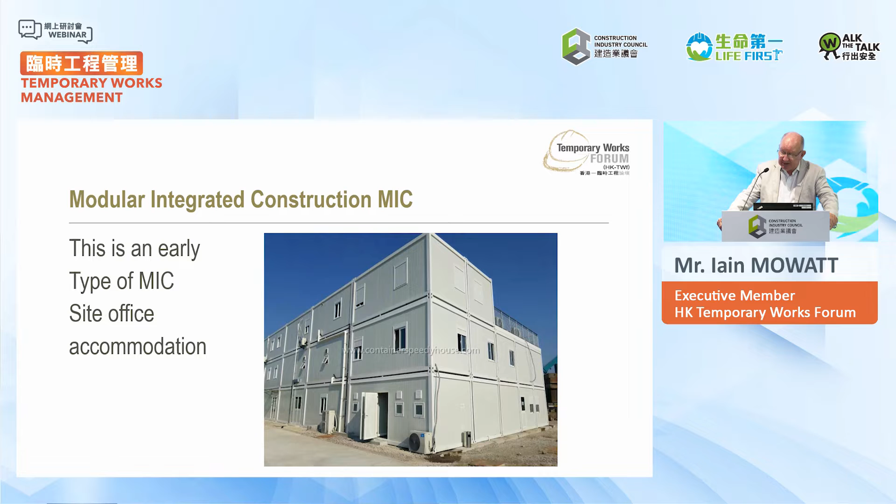So we started with MIC. MIC is not a new concept. It's quite an old concept. The containers you see was the very, very, very early MIC. Then we started making up units, and we started erecting the units on site. So we've moved a very unsafe process into the factory. However, it still has problems. We precast in the unit, we're fitting it out, we've got pre-finished, and then we move it onto site.

So we have some challenges with MIC. It's very heavy. We still got working at height because somebody has to get up onto the top of the unit to release the crane shackles. So we still have working at height. We still got challenges with that.

And there is an issue with lifelines and anchors on that. Generally, when I've seen people unshackling containers, they are fixed to a lifeline that is actually below their feet. The anchor point is below their feet. So if they fall off the container at height, then it's a fixed line lanyard, which probably the anchor will fail by the time they stop falling, or if it's a lower height, they hit the ground before an elasticated lanyard works.

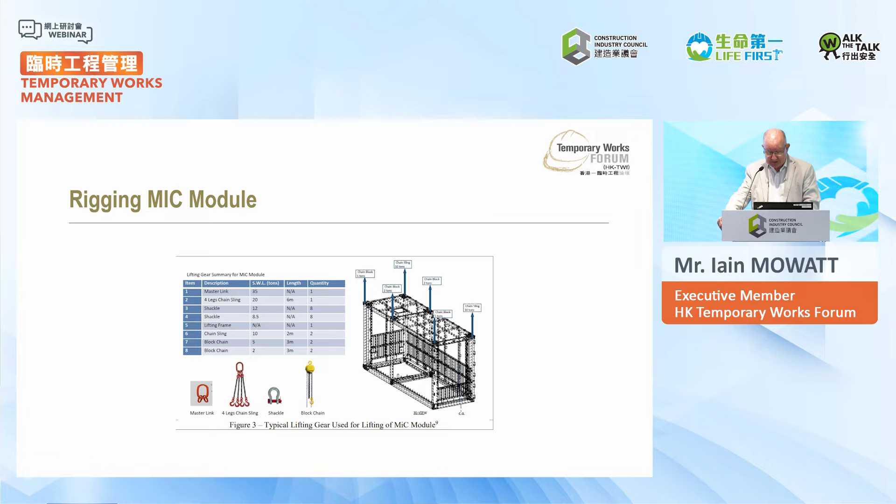So there are challenges with MIC, but it is a major, major step forward. Of course, the other thing with MIC is it's quite expensive because we've got double slabs, we've got double walls, and whilst that's very good for sound insulation, it's not very good for cost. So the double wall system and the double slab system is excellent from a fire protection point of view, but it's not very good for a cost point of view.

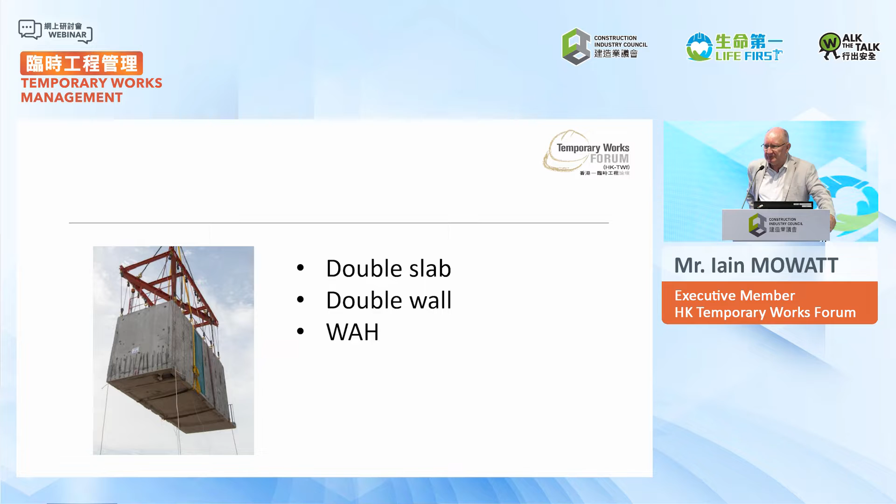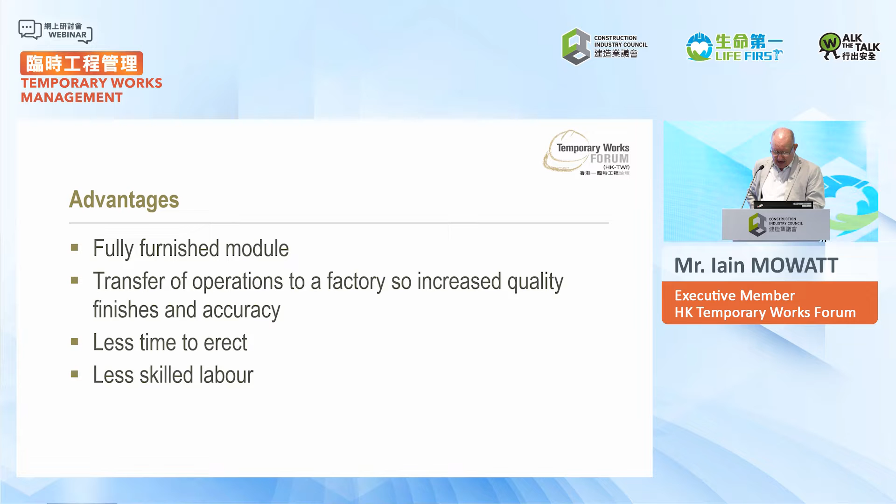So the fully furnished modules, the advantages are that we transfer operations to a factory, so increase the quality. There's less time to erect, less skilled labor. So all the things that we need to achieve, it does achieve. However, it does have some disadvantages. The weight is a disadvantage, and it doesn't totally eliminate work at height.

The grid size is limited to road transport, 3 meters by 6 meters. Now, Cambridge University did a study on grid sizes, and they came out with a number that a 15 by 9 meter grid suits every single building ever built anywhere in the world, which is a sweeping statement, but it does seem to fit. So a module that works within the 15 by 9 meter grid is ideal.

So then we move on to the factory in the sky. Now, this was a very brave experiment. It was done in East London by Mace. A very brave experiment. It never really worked. But it was a very, very good idea, because you transferred all of the site activity to a factory activity, but the factory was actually on the site. So it was a very good idea.

The photograph there is an aerial view of the factory. It was lifted on the 4 corners of the building, so it was very complicated hydraulics to lift it. It was all fully automated insofar as it was all precast. There were no tower cranes on the site. The orange things were the cranes, a gantry crane, moving over the top of the factory, lifting precast units into place.

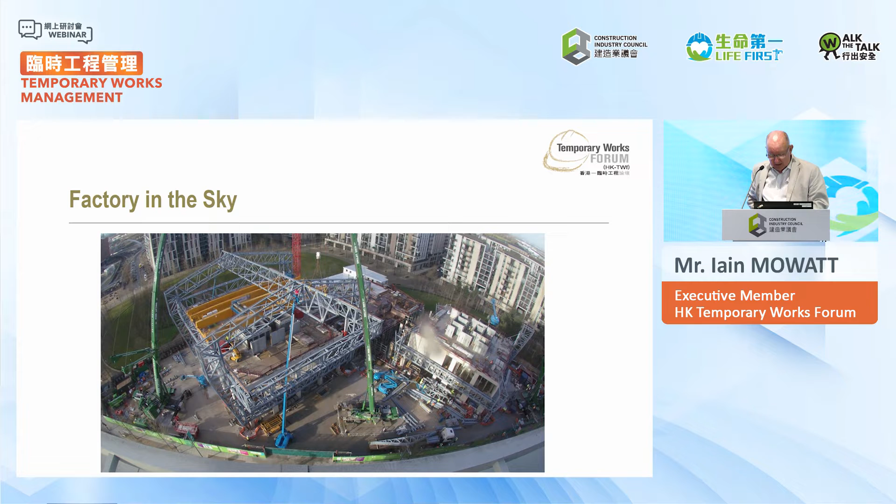The advantages were that it was all precast. It was a 10-day floor cycle, including the finishes and the curtain walling. So it was a completely weather-tight structure, lifted up, and it was modern methods of construction.

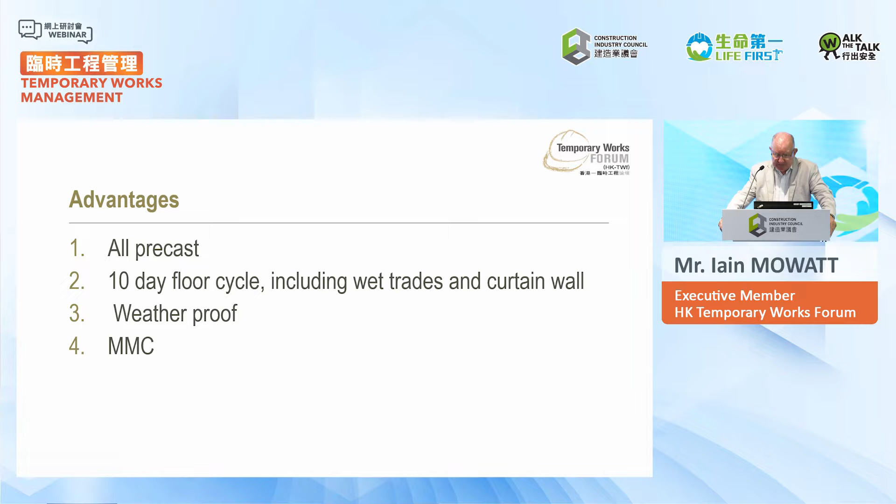The disadvantages are it was very, very difficult to dismantle. All the time they made up in the construction was lost in the dismantling. It was also expensive, it cost 8% of the total building cost. And there are very, very few subcontractors with that kind of hydraulic experience, because you had to lift the whole thing on the 4 corners of the building.

So I did some work for Bryden Wood a while ago, and I was really impressed with what they were doing. They adopted a platform approach very much copied from the car industry. For example, an Audi has got exactly the same platform as a Volkswagen, exactly the same. And that's what they set out to achieve.

So I'm going to show 2 videos now. The first is the module, the mock-up that they did to show that the modular approach would work.

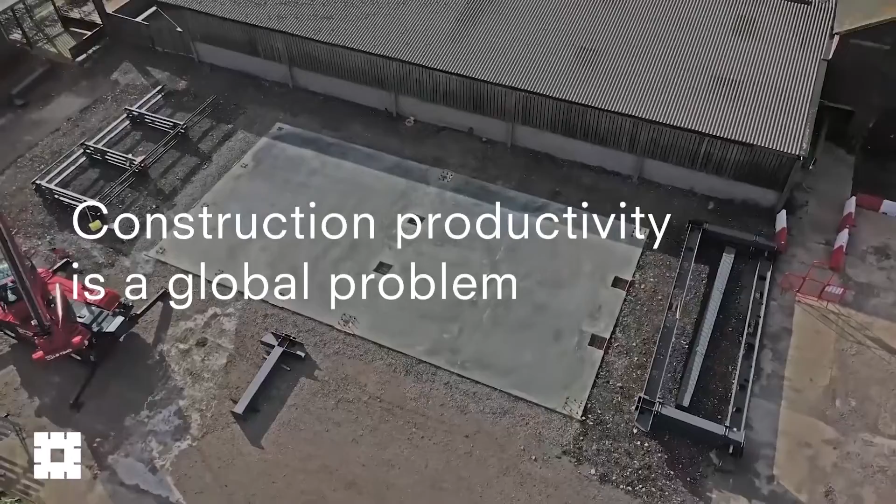Today we're in the Construction Platforms Research Centre in a place called Ropley. It's actually a farm, but a farm that I think is going to be a catalyst that's going to help change the future of the construction industry. Today we've been showcasing some work that we've been doing researching the use of platforms in construction.

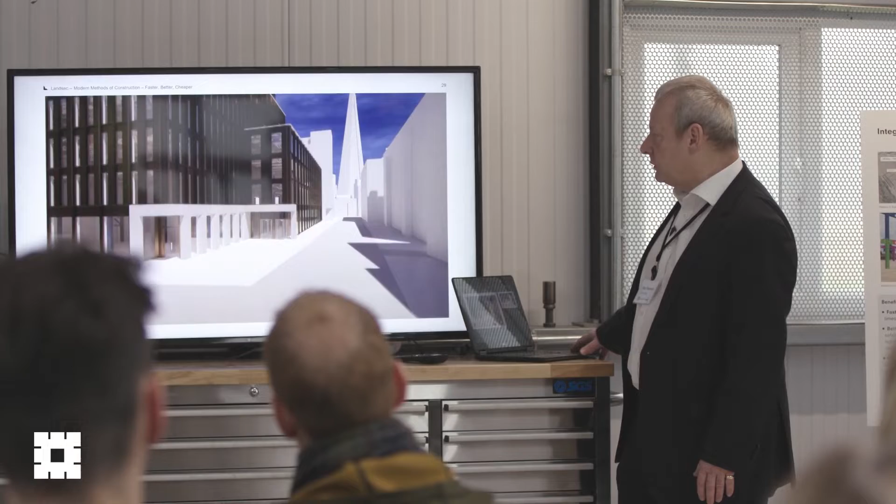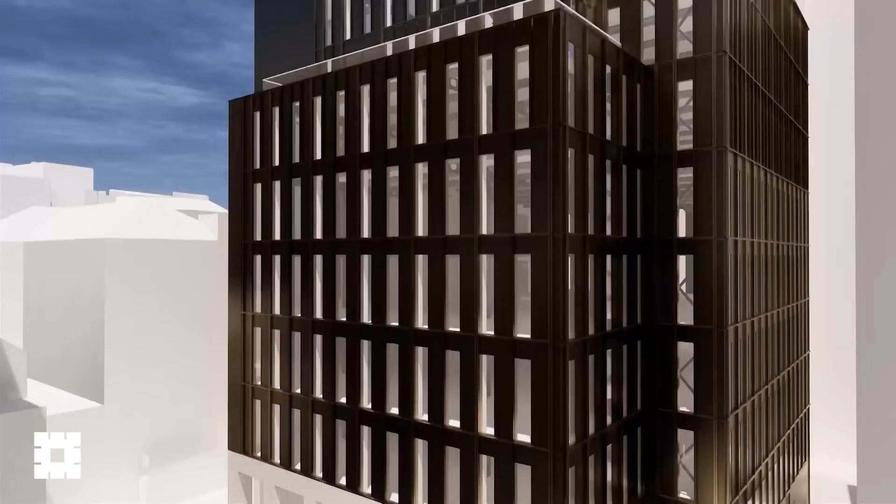The vision was, how can we take the construction of a commercial office building and break it down into a kit of parts that we could deliver onto a site and assemble, rather than construct a building in a traditional way. So what we've got to do is take the precasting techniques and bring them to site.

What we're doing here effectively is we're trying to develop what we call the productive routine, so the processes that people can repeat time after time safely on site and efficiently, which drives productivity.

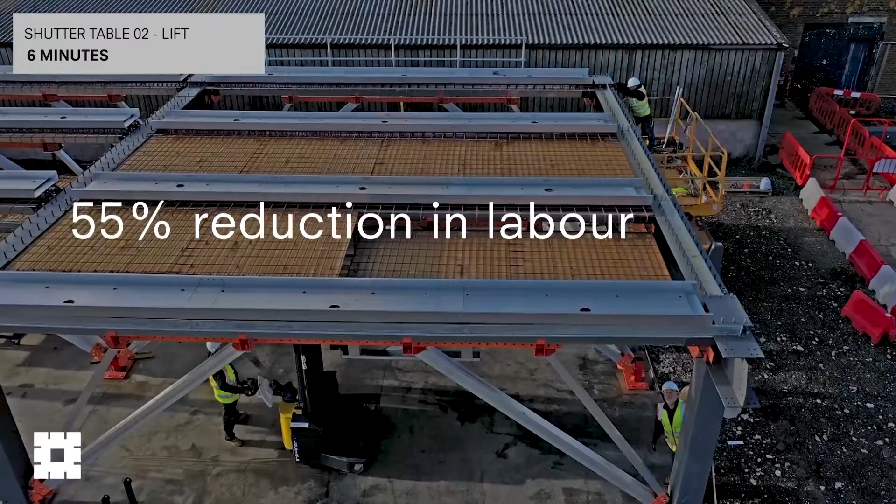So the Transforming Construction Challenge is there to help the sector change the way it works. And this project, it's almost an ideal example of the kinds of things we want to see. We want to see a kit of parts approach coming forward, a platform approach to buildings, taking a manufacturing discipline to construction so that we are changing the processes.

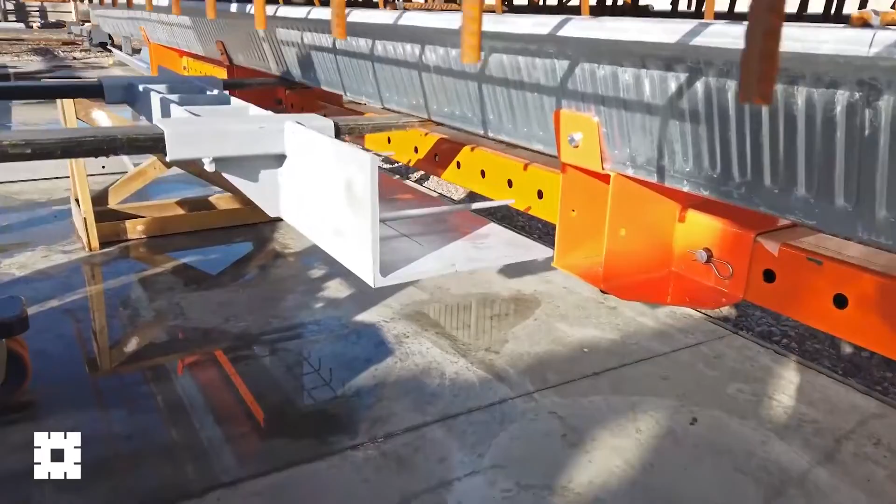The prototyping has been key in being able to prove that those ideas are practical and really work, and to build the confidence both in ourselves as a client and in the construction industry partners that we would use to build a full-scale project.

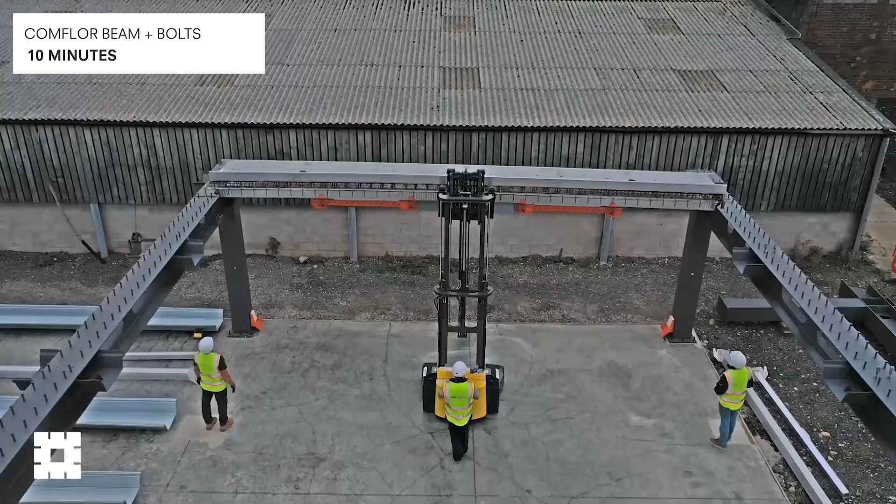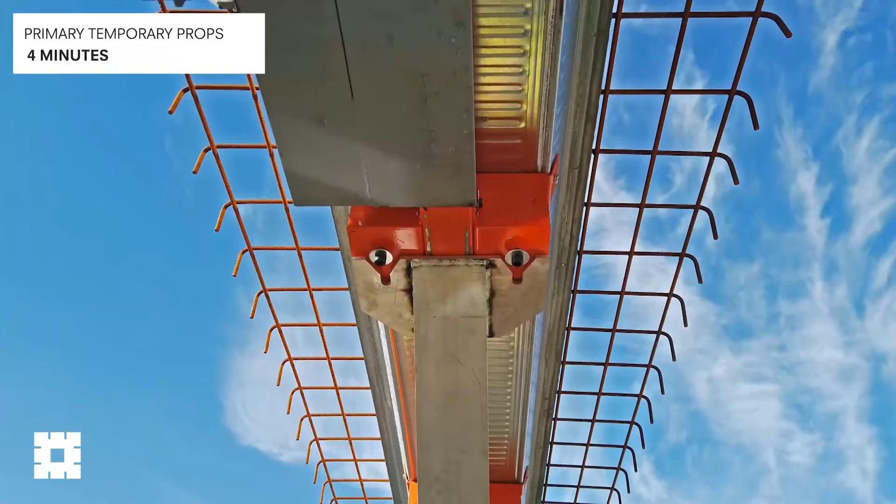This project takes out so much of the interface problems that have caused so much trouble in the past. It just uses intelligent techniques like not lifting up the really heavy stuff or not transporting the really heavy stuff miles and miles and then craning it into place, making a set of very standardized lightweight components that you can put together really easily with low manpower, and then pumping in the concrete at the last minute.

So our involvement in this project has been as the design development team alongside Bryden Wood and the prototype builders. This is the third platform.

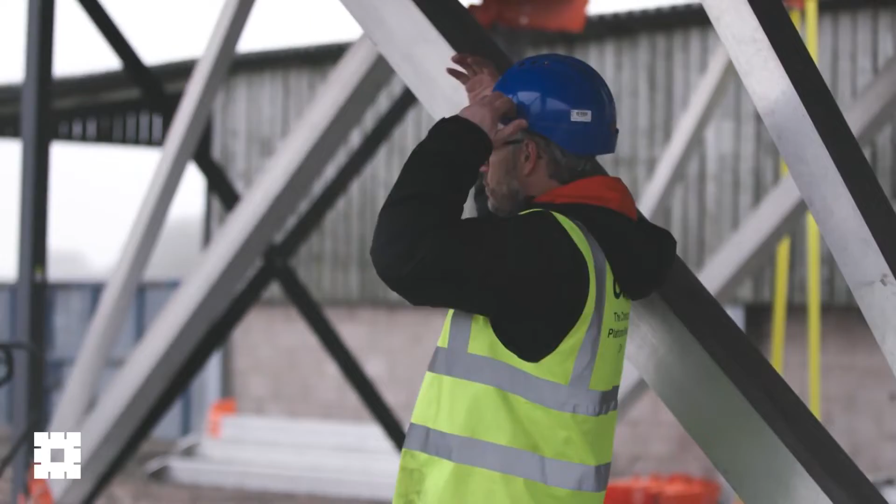Platform 1 was for smaller spans. Platform 2, again, that were a larger span, and that were for residential, which got companies like Landsec who were wanting to improve how they build their offices. Offices need a larger span than what Platform 2 can offer, so naturally we called it Platform 3 and gave them larger spans.

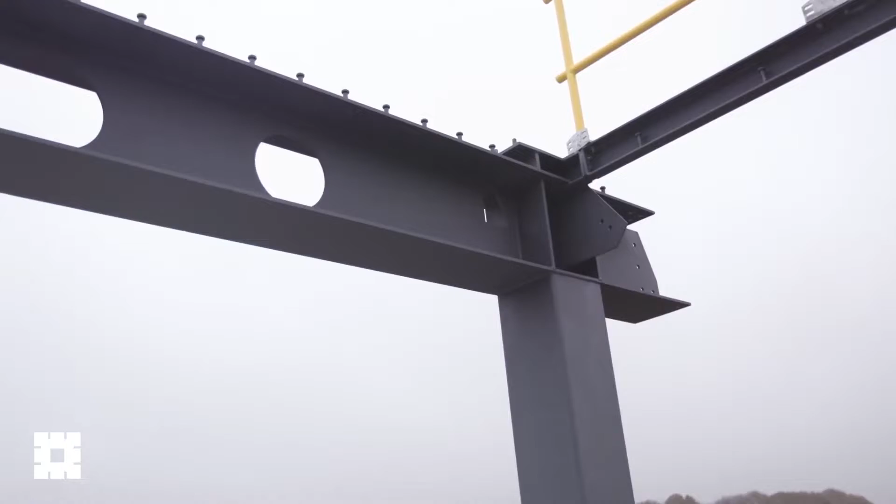So for us, delivering the kind of targets we wanted to see in terms of faster delivery of projects, lower cost, greater productivity so we can produce more with the same workforce, and reducing emissions and improving the whole life value of the buildings.

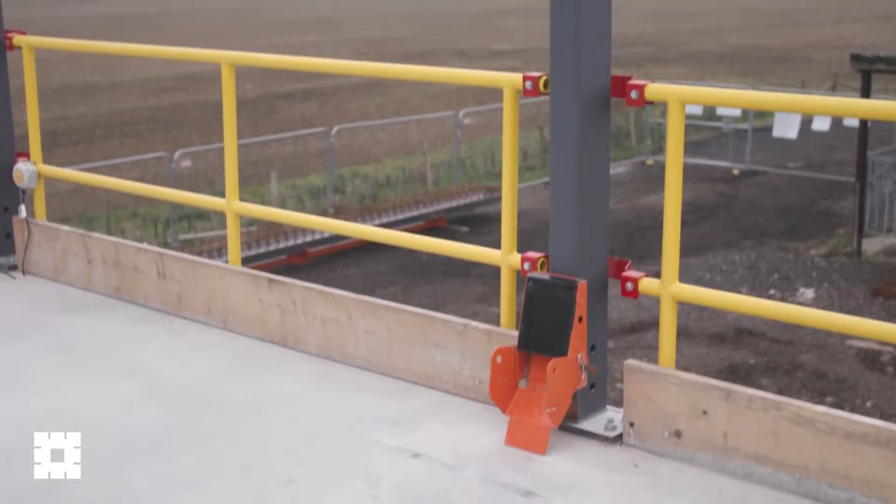It's important that we don't just get time and cost savings, we need to do things better, we need to do things safer. It reduces the amount of people or workers that have to be on site, so that means that it reduces the risk in terms of having accidents and incidents.

We've gone from the sort of laboratory into the real world, and the real world is now really, you know, we've been on site at Sumner Street and ready to start construction in the early part of 2020. So getting all of that learning and applying it straight away is fantastic.

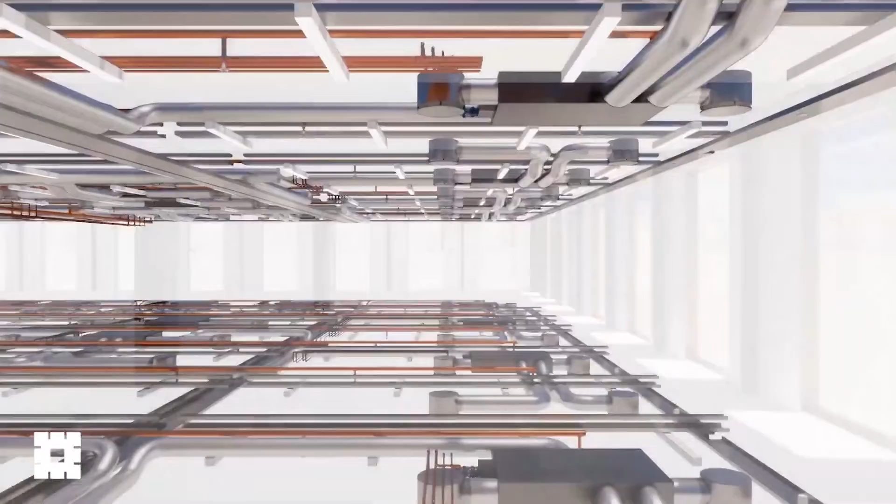It's always hard to innovate, it always feels risky, and the team have marched through all of that and achieved a huge amount, and we really have line of sight now to executing on this first building down in Southwark, to then take it on to the next and the next and the next.

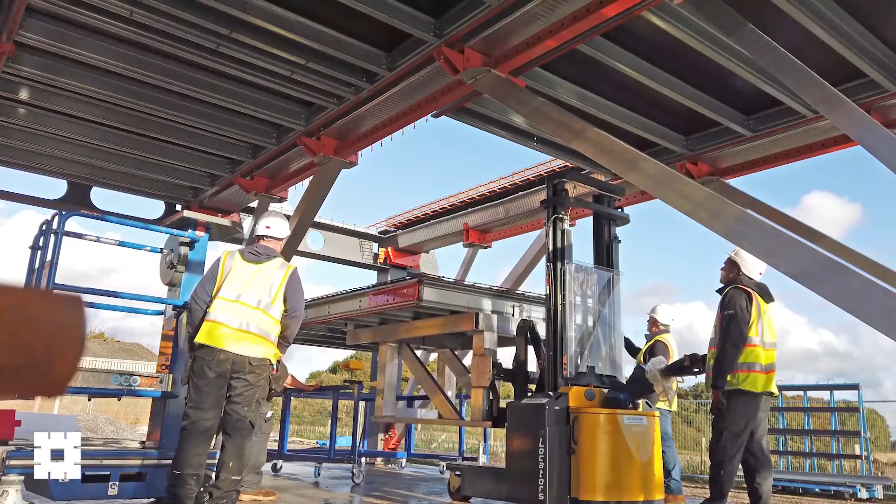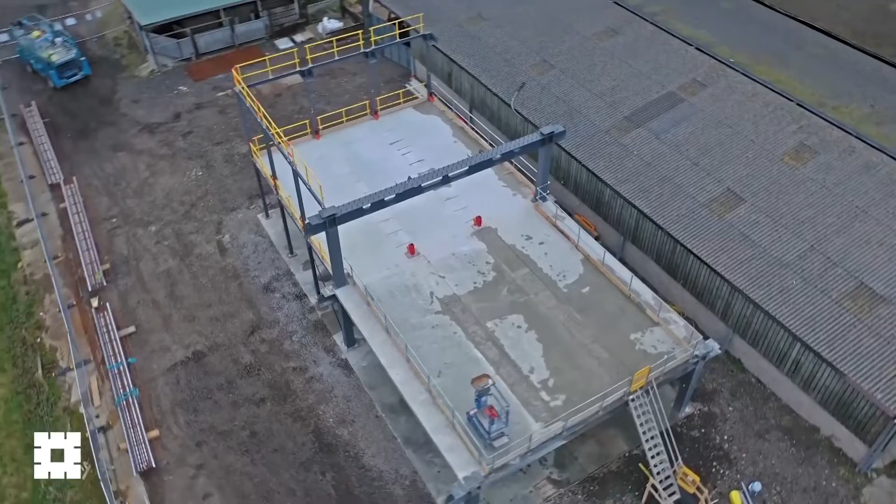There are tremendous opportunities to improve productivity in construction. Unlike other industries which now are making incremental gains, we've got this opportunity to really leap forward in terms of productivity. You have one of the UK's largest companies working with one of the UK's smallest companies, with probably one of its most innovative design organisations, that have come together to really produce something that we hope will start to change the way that buildings are designed, delivered and constructed.

That was the platform approach provided by Bryden Wood. I'd just like to show a video of the actual office building that they did build in London. The building is called The Forge, and Bryden Wood put it together. This is a very quick video of that.

Welcome to The Forge in central London. What you see around me is one of the most significant events in the future of construction. The Forge is the world's first major commercial development, developed by Landsec, to be designed and built using a platform approach for design for manufacturing and assembly. It's also the UK's first net zero carbon commercial building.

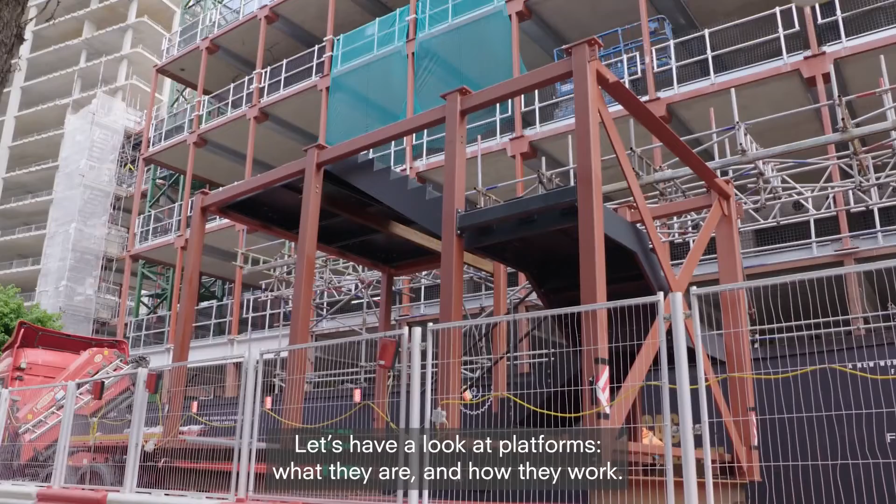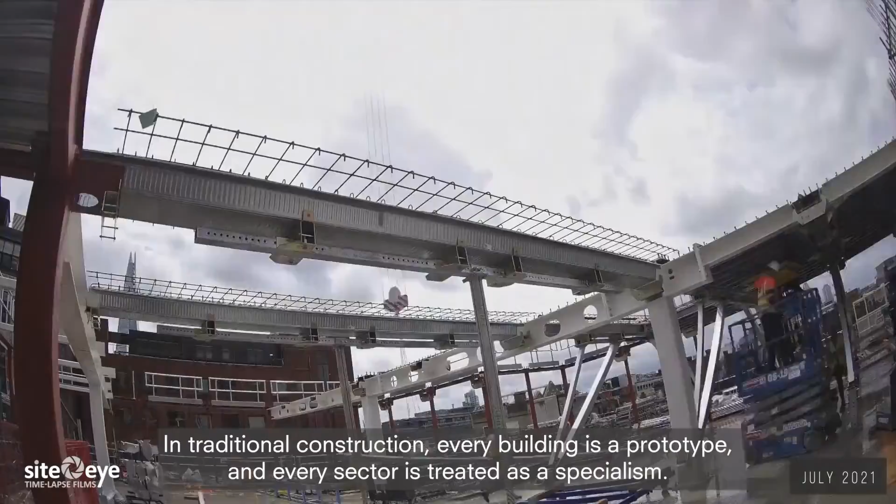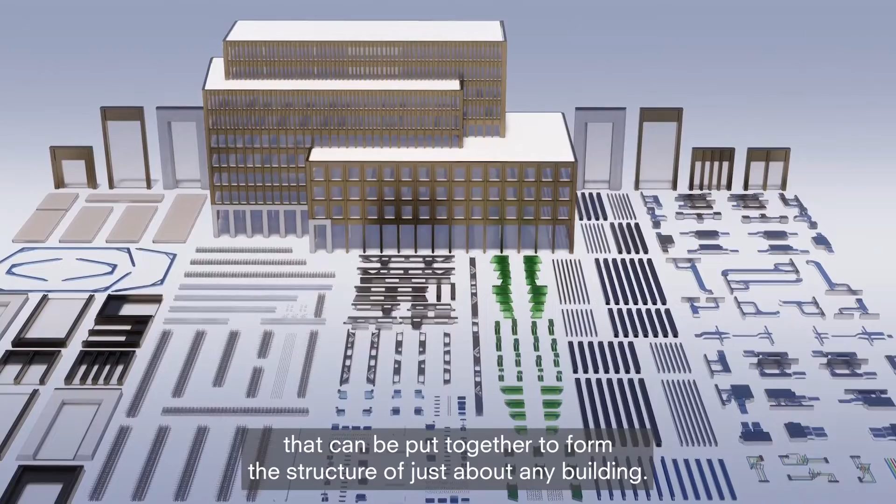Let's have a look at platforms, what they are and how they work. A platforms approach takes the lessons learned by the manufacturing industry and applies them to construction. In traditional construction, every building is a prototype and every sector is treated as a specialism. The platform approach looks for commonality between sectors. By working out what buildings have in common, you can design a standard kit of parts that can be put together to form the structure of just about any building.

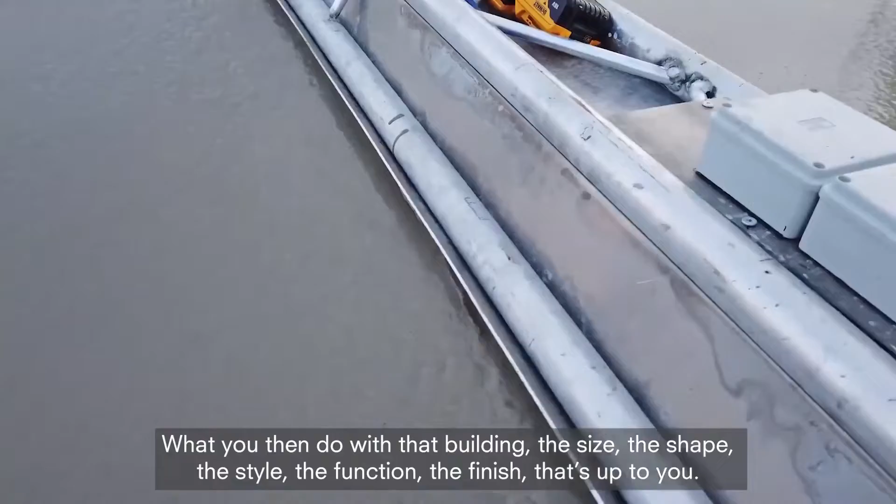Standard parts fit together in standard ways, so the building is leaner and quicker to put up. What you then do with that building - the size, the shape, the style, the function, the finish - that's up to you. Standard parts are also designed and refined repeatedly, so the finished article is the best it can be. And because they are standard, they are manufactured precisely, which means we use fewer raw materials and there's no waste.

Here at The Forge, that translates into an increase in productivity of 30.5%. And we're reducing embodied carbon by 24% compared to a traditional commercial office. On a normal building site, around 30% of all materials ends up as waste. Not here.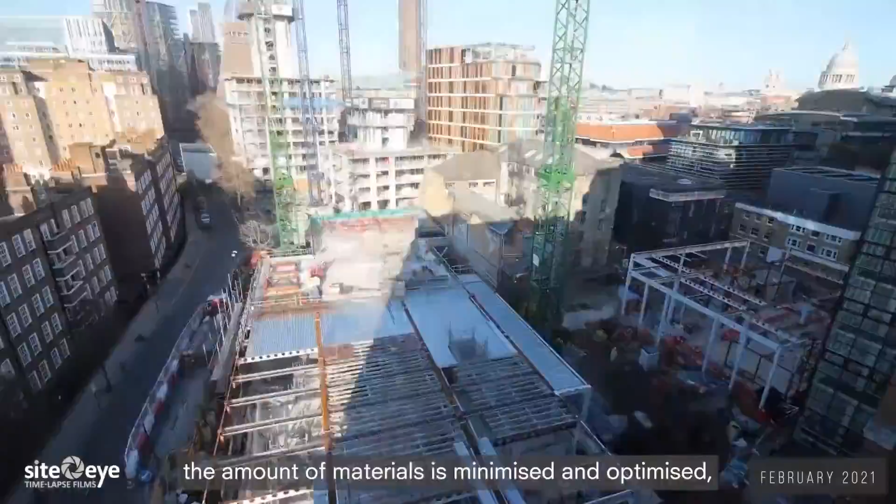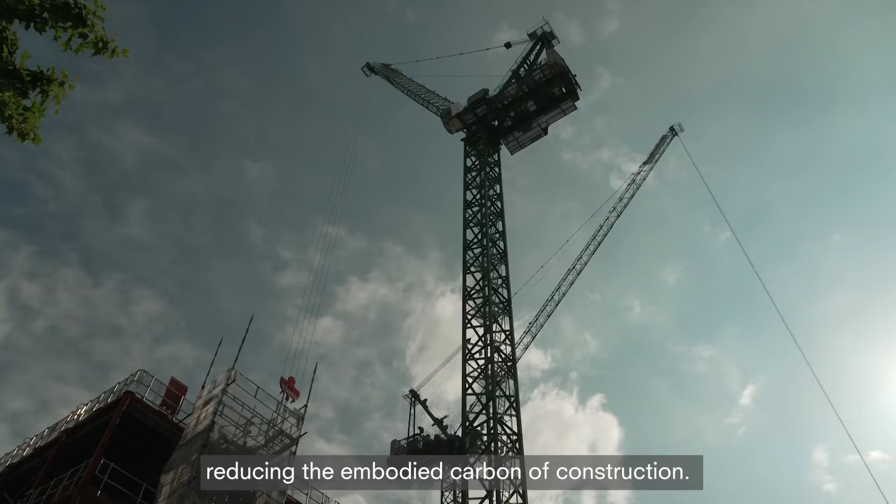I think another area that this project really helps is we're all focused on reducing construction impacts. We're all focused on net zero carbon buildings for the future. Having an approach here where the amount of materials is minimised and optimised, and where waste is reduced to an absolute minimum, are great steps towards achieving that goal, reducing the embodied carbon of construction. In addition, we've designed this building to be particularly energy efficient, using a zero carbon solution for our heating and cooling - air source heat pumps powered by electricity - taking us forward to a future where buildings will all be built to some degree in this way.

What's so exciting and transformational is this is not a theory. Look around me, this is real. This is real change happening right here, right now.

So Bryden Wood reduced the amount of tower cranes required, and they improved the energy efficiency. But what is important is that they totally eliminated work at height, eliminated it altogether. So it was a very efficient building.

The disadvantages are that we're going to have to radically change the way we procure construction, and we're going to have to engage with the client right at the beginning. That's a positive plus, but getting clients to change is going to be very difficult. We've also got to engage with architects - generally they don't have any Hong Kong experience - and we've got to get used to a DFMA approach, including for the E&M and ABWF. So that is for buildings.

For civil engineering, we've got to embrace technology to do it. I was a judge on a safety by design initiative some years ago, and VSL put in a proposal for the OHVD on the Tuen Mun-Chek Lap Kok tunnels. I'd just like to show you very briefly what they did there.

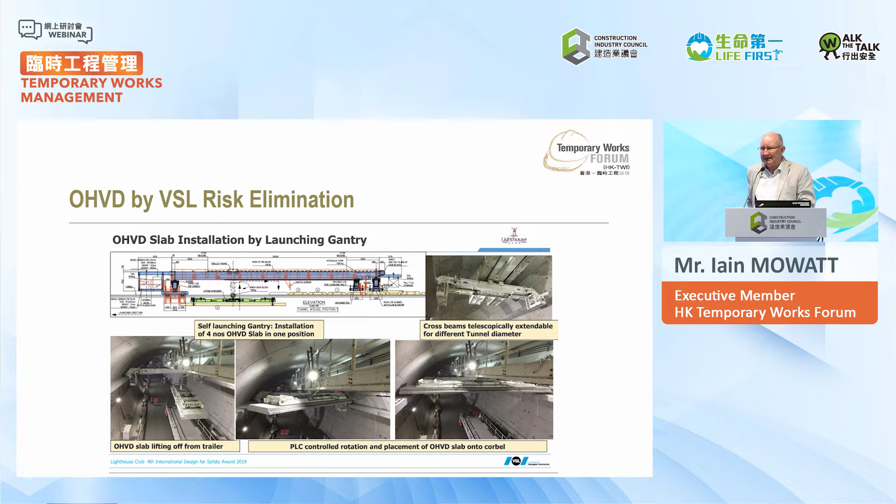So there is a future for construction, but we cannot continue the way we are doing. I'd like to receive feedback from the listeners now. If you've got any questions or comments on this, please email CIC, the safety seminar, at cic.hk. Thank you very much for listening.

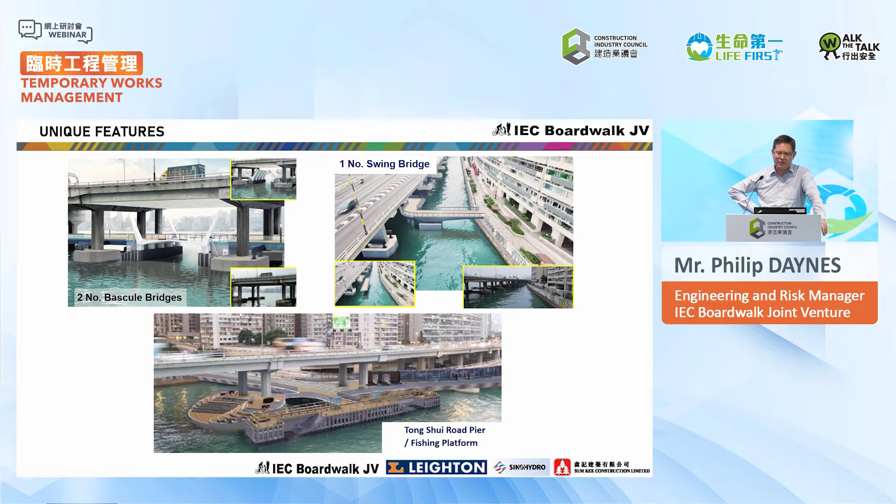This is a video put together by Meinhardt, CEDD and LWK during the design stage, showing what the project will look like. We start down on the Causeway Bay side - you can see the boardwalk is outside of the perimeter of the Island Eastern Corridor, then it moves underneath, with a number of viewing platforms all along the alignment.

Then we move to the first movable bridge. The movable bridges are required to allow boat access to the inside waters, because generally the boardwalk is quite close to the sea level, so it's an obstruction to boat traffic. Moving up, we come to the swing bridge, near the Provident Centre, which again will allow boat access along that inner waterway.

More viewing platforms, and then as we approach North Point, the boardwalk comes out from underneath the Island Eastern Corridor, as there's a slip road that comes down, and then we come into Tong Shui Road Pier. At this location, we're going to build a new fishing platform with cascade steps, which will allow users to get close to the water level - this is quite a popular fishing area as well.

So that's an overview of the project. Now moving on to temporary works - what are temporary works? Temporary works is pretty much everything we do on a construction site. There are many forms, from tunnel supports, tower cranes, slope works, false work, demolition, to permanent works that are being used as temporary work. So every engineer on any construction site is going to come across temporary work.

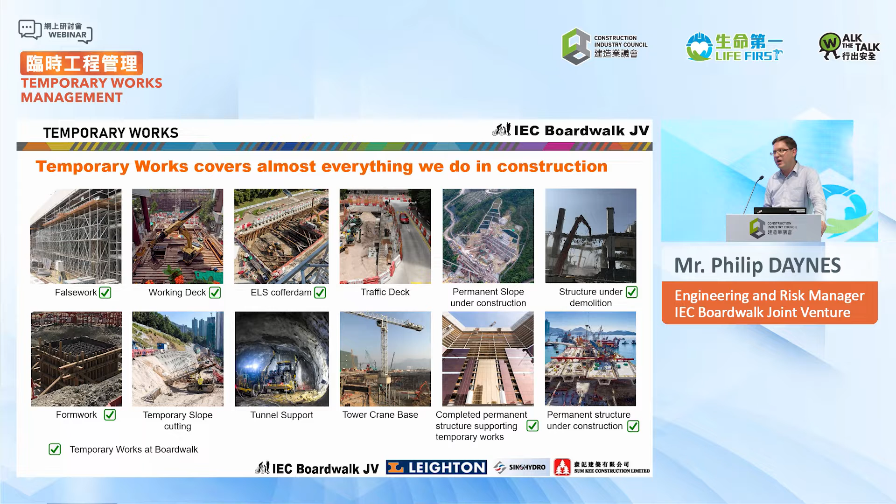It's almost everything we do. We've got a whole range of different types of temporary works on the boardwalk. But unfortunately, as Iain touched on earlier, temporary works often fail. This results in injuries and fatalities, and it's really an unsustainable position. We can't keep killing our colleagues - it's just totally unacceptable.

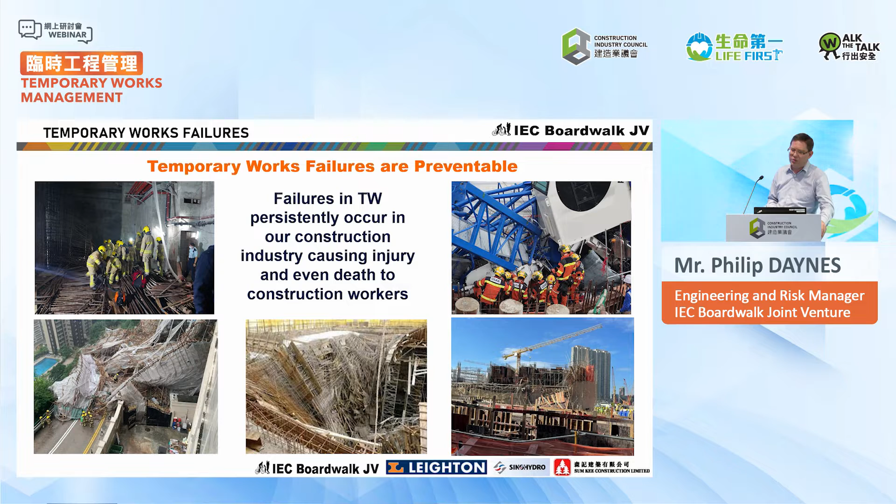So we have to work on ways to improve that. Iain's touched on some of those, and you'll see some of those in the presentation. But even where we're working in a traditional style, we still can do more. The Temporary Works Forum and CIC have published guidance on temporary works management. It's good practice, and the objective is to minimize injuries during temporary works.

On the Boardwalk project, we have a design and control of temporary works procedure. That was introduced in 2022 at the start of the project, before the CIC TWF document, and our temporary works procedure is based on Leighton Contractors' temporary works procedure. A number of different contractors have temporary works procedures, but you'll see there's a lot of commonality with the Temporary Works Forum document - although some of the terms are different, the principles and the approach are all the same.

So again, we've got different contents, but the naming may be different, the sequence they're in may be different, but they're all covering the same aspects. We'll touch on these in coming slides.

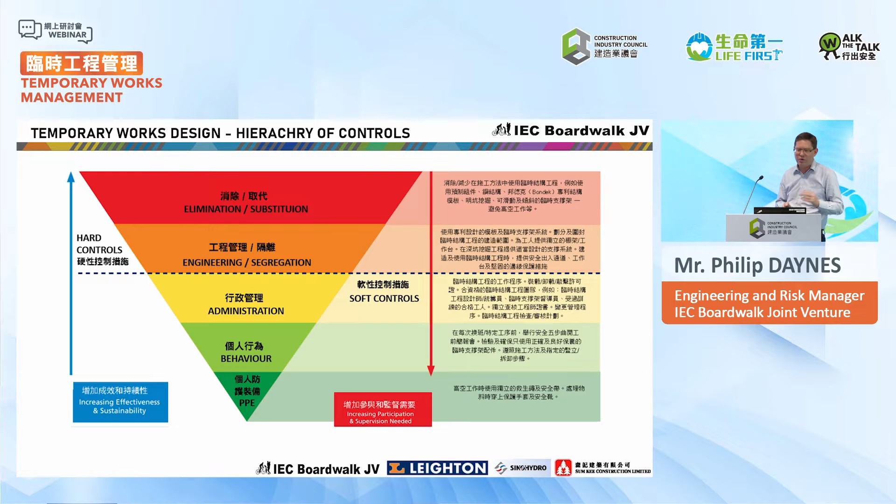As an engineering manager, and in Leighton, we have our hierarchy of controls. We try to focus on elimination and substitution - if we can eliminate temporary works, that's the best scenario. If we can't eliminate them, we need to engineer in solutions so that the works are safe, rather than relying on behavioral or other aspects. The controls then move down through administration, behavior, and finally PPE. If you're using PPE, that is an absolute last resort, and no design should ever start on the basis someone will use PPE. So the best thing to do is eliminate the temporary works.

Eliminating temporary works or engineering out solutions starts from the very start with planning. Both documents have a life cycle, and we'll go through that now. So plan temporary works and allocate risk.

Temporary works can vary from a number of days to a number of years, both in the construction and in the operation. So it's important to understand the life cycle of the temporary works and also the time needed to do the design, get approvals and procure.

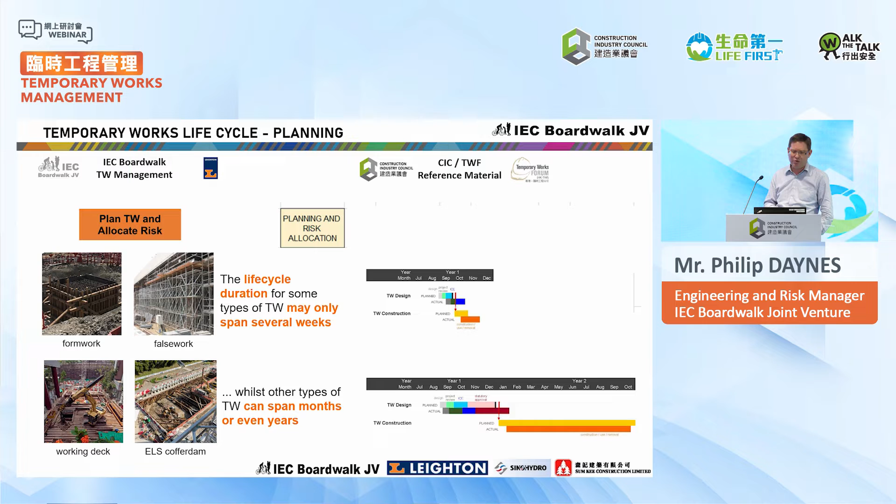So plan and allocate, then we do design and checking, and the very start of the design is the design brief. A written design brief is very important because it conveys a clear set of instructions to the designer on what's required. It's important to make that as complete as possible and make it unambiguous.

Saying, I need a plant platform to support a crane is a pretty vague design brief. How long do you need it for? What size crane? What are you going to be lifting? Are there any constraints? Any particular materials you'd like to use? So filling in a design brief is very, very important.

Another aspect is a task review. So under the procedures, a designer takes a design brief and comes up with some concept designs. That's reviewed jointly between the operations, the engineering team, and the designer to find what's the best balance. Because there'll often be different ways to do the same thing, and it's about finding the right balance between the options, the methods, the timing, the cost.

All temporary work is collaborative. The best temporary work schemes involve design, client, operations, subcontractors, because no one person has the best idea. Involving the team will get a better solution, and it gets more buy-in, which means there'll be less change later on.

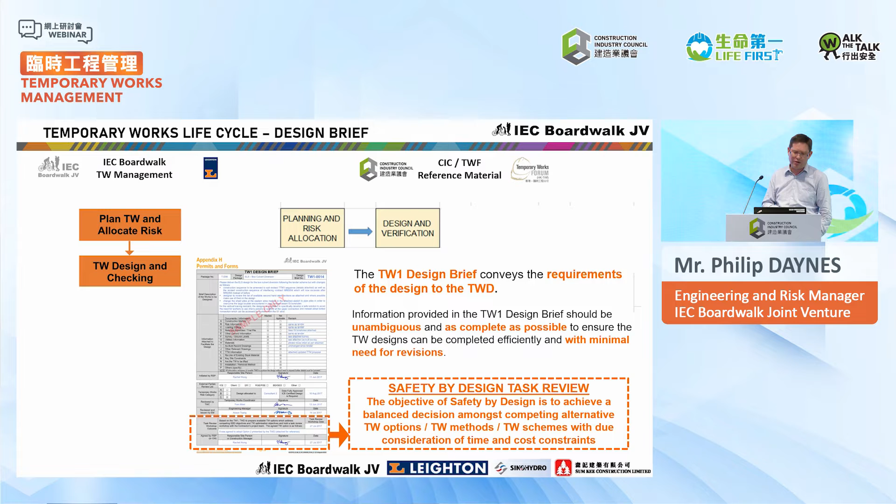Procure and construct the temporary works, and then verify permits to load, permits to remove. And then managing change, because change is inevitable. Changes will happen on site. Unforeseen conditions, unforeseen ground conditions, services out of position.

Change in design, which may lead to resequencing. Change in subcontractors or materials available. There's a whole range of reasons things can change, but managing that change is key.

Often changes are not checked by the designer. Sometimes there's unauthorized changes. Sometimes program constraints push how much time is allowed. And sometimes changes happen but they're not documented, so people don't realize, and they're working on old assumptions.

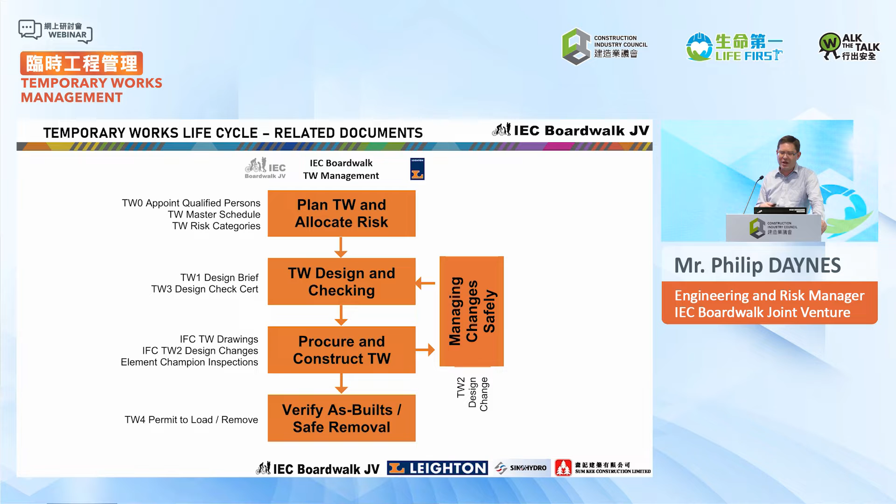So under the procedures, there's a design change form. On our project, it's the TW2 form, used to request and record changes and make sure that they're reviewed appropriately. So again, we have a life cycle, and every stage on the life cycle has documentation to help support that, record it, and make sure that it's a well-managed process.

But a process is one thing. It needs people to operate it. So again, both documents talk about the people. They assign clear responsibilities and obligations at different stages of the procedure.

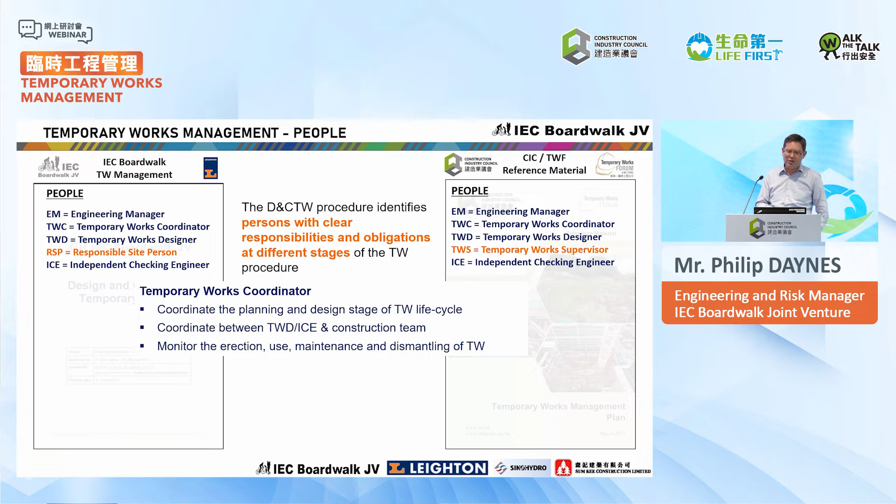Temporary Works Coordinator is a key person responsible for coordinating the planning and design during the whole life cycle, acting as a bridge and communication link between the designer, the ICE, and the construction team, and to monitor the erection, use, maintenance, and dismantling of temporary works.

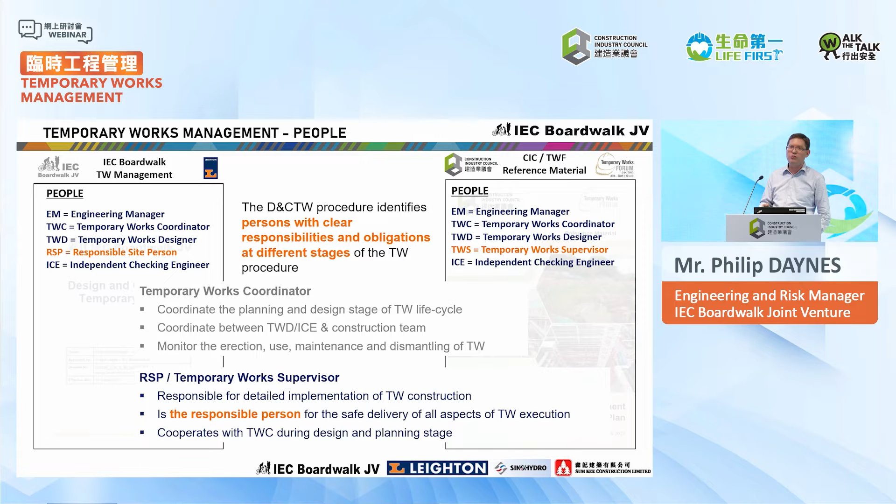Another key role, which we call a responsible site person, but under the CIC document is a temporary work supervisor, is really the key person, because he's responsible for the safe delivery of all the temporary works execution. He or she is responsible for the detailed implementation of the temporary works, and as part of that they're cooperating with the TWC during the design and planning stage. So the temporary work supervisor makes sure the design is built as it's planned.

Again, we touched on the documentation. So again, we have a temporary works master schedule, that's the TW1 under the CIC documents. An appointment form, so everybody is appointed and clear on what their roles and responsibilities are, and they sign as accepting that responsibility. There's a design brief, managing design change, and a permit to load and remove.

One of the differences on our procedure from the CIC document is we have a design check certificate. The assumption from CIC in the reference material is that there will obviously be contract requirements which relate to the design checking. So on our project, we have in our particular specification a template form. We've modified that to include things necessary in our procedure, such as the risk categorization. At the start of our project, we did a mapping exercise to demonstrate to the client team that we've got everything you want on our piece of paper, and we've got some extra bits. But we need our form because those extra bits are very important to us in the management process.

And then that was approved. So any of these documents can be and need to be modified to include the contract requirements. Every contract will have different requirements on what specified checking is required and who can check it. So the contract and the guidance documents can be linked together to perform a project-specific procedure, but a common procedure across projects.

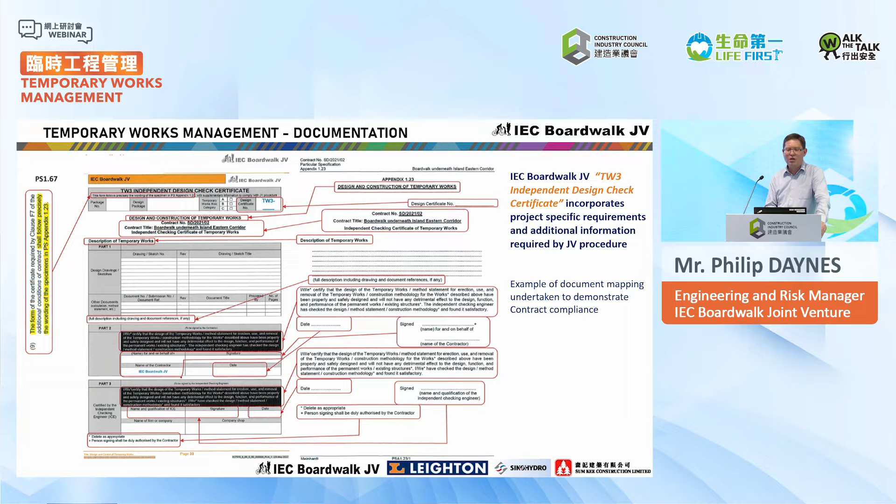And then risk categories. Again, our procedure, CIC Temporary Works Forum, both have a risk category because the risk category determines what qualified people need to be involved in the design, checking and inspection. So category A, B and C - major, medium and minor. There's guidance on what those type of categories are, and again that can be jointly arrived at during the task review workshop if there's any uncertainty. And then that risk category drives the checking and procedures.

Again, regular face-to-face training, refresher training, e-learning modules, all very important in the development and implementation of temporary works management.

And then one thing that we found is obviously scaffolding and access is a major part of any construction site. And managing that process through the whole temporary works procedure is very cumbersome. So we have an access scaffold and working platform procedure where we have typical designs which are already approved and can be built very easily. So common access staircases, simple access walkways along formwork, etc.

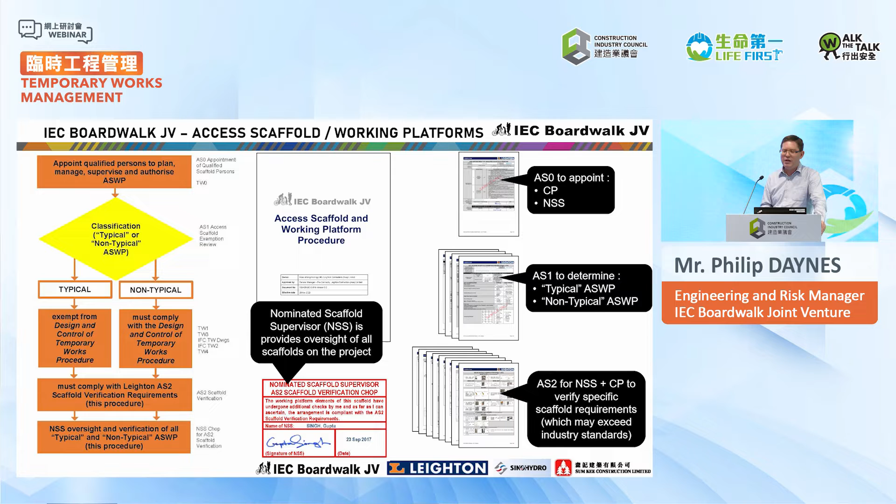So under the procedure, there's an assessment done. Is the access scaffold typical or non-typical? If it's typical, it can follow the typical details and be constructed very easily. If it's non-typical, then it goes through the full temporary works control process. So that procedure allows the complicated scaffolds to follow the temporary works procedure, but the straightforward scaffolds to follow a simplified approach. So we have a nominated scaffold supervisor who oversees all the scaffolding on the project, and then there's appointment forms, assessment forms, and verification forms, the same as for temporary works.

So that's an overview of our procedures. Let's have a look at some of those in practice. So going right back to the start, planning.

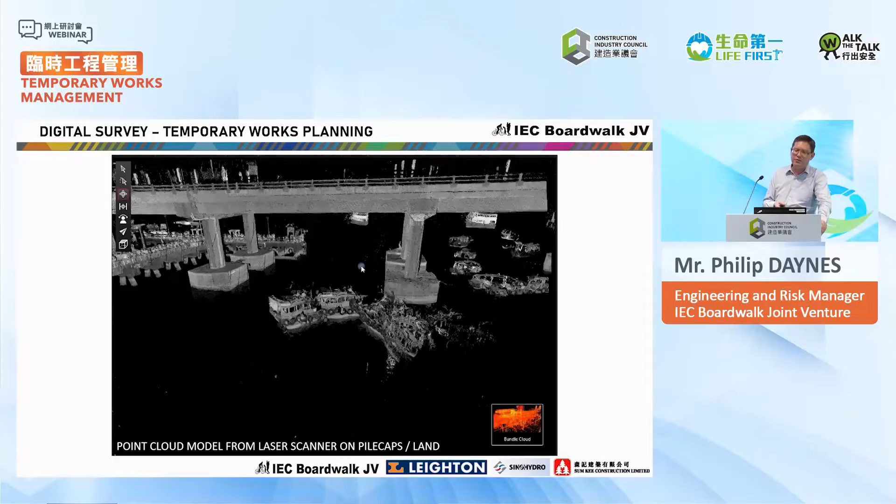One reason for change in temporary works is because the conditions are not as expected by the designer. There's really less need for that now because laser scanning is simple, straightforward, and commonly used across projects. So I can take a set of drawings and as-built on where the Island Eastern Corridor is meant to be, but then at the start of the project, I laser scan it, validate that, make sure all my levels are correct. There's a little bit of misalignment in some of the pile caps. I work off the as-built information from the laser scan, and that makes sure all my temporary works and my permanent works fit.

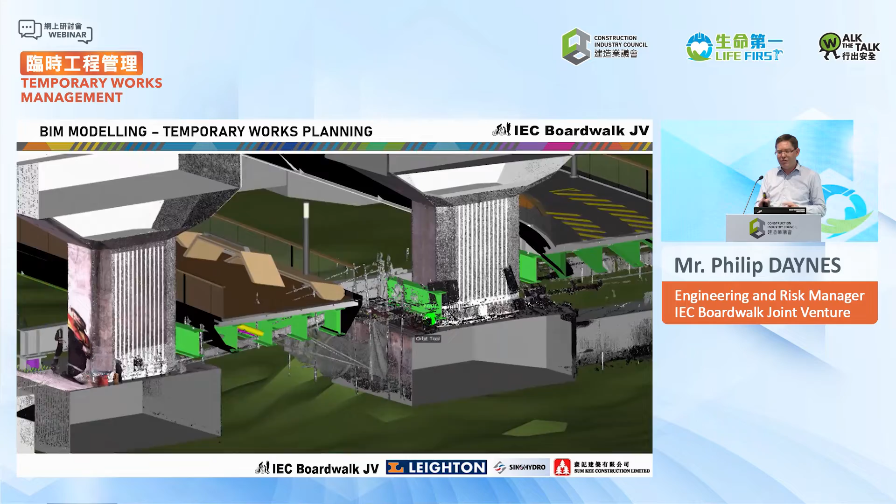So this type of thing is standard in Hong Kong now and really needs to feed into temporary works design, as is BIM modelling. BIM modelling is commonly used across projects, particularly on permanent works, services and things like that. But it feeds straight into temporary works as well, because you understand, you feed in your laser scans, your point cloud, you know where all of your existing constraints are, you've put in your permanent works, and then you can really plan your temporary works to make sure there aren't any clashes, to make sure that if something's out of position on the laser scan, you're designing for that. You're not assuming it's somewhere else. So these type of tools are key to temporary works design and need to be fed early on to the temporary works designers to make sure they're designing appropriate solutions and maintained throughout the life of the project.

Aerial drones, we use a lot on our projects, but not at the boardwalk. We regularly use aerial drones to monitor progress on site. It can also be used for inspections and other aspects. But on the boardwalk, Victoria Harbour is a restricted flight zone. That doesn't prevent drones flying there, but it means there's a lot more onerous requirements - CAD approval, pre-flight plans, post-flight plans, etc. So we mainly use the aerial drones for progress photos and monitoring. But drones are something that are used generally and need to be incorporated in planning as well.

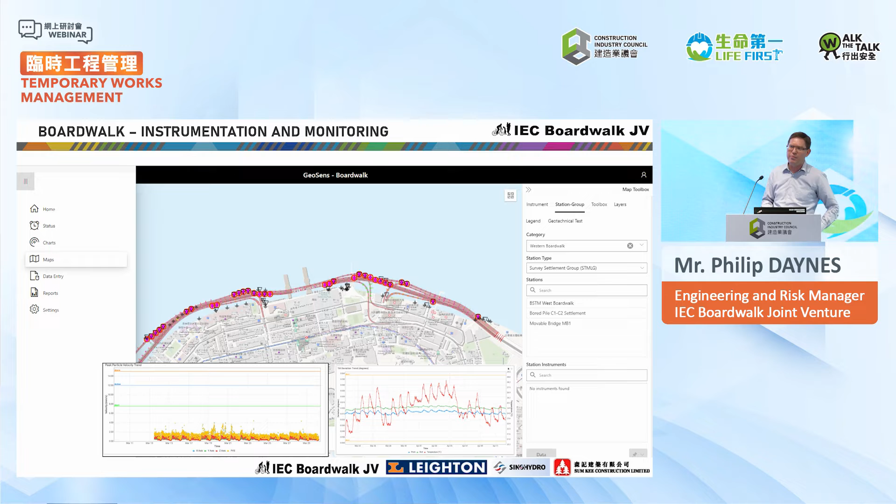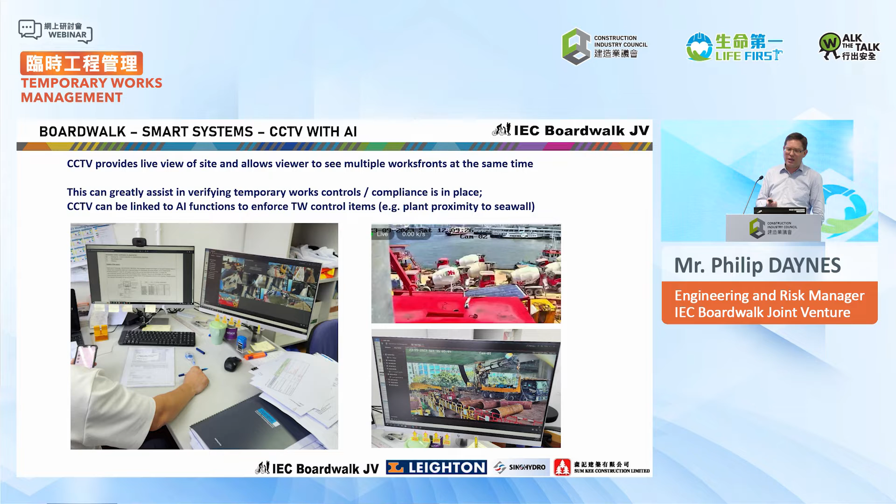Obviously instrumentation - we're working underneath a live highway, standard monitoring across Hong Kong, real-time tilt meters, vibrograph settlement monitoring. So that's all normal, but again, an important component in temporary works management, as is CCTV. CCTV is now common across projects. It's widely used under the 4S system, and it can be an important tool for temporary works management as well. It allows people to see multiple work faces at the same time to check controls are in place and compliance. And linked with AI functions, it can also help manage things like the proximity of plant to seawalls or other exclusion zones, loading areas, etc. So again, it's taking all the tools and all the technology that's available and utilizing them to enhance the temporary works management approach.

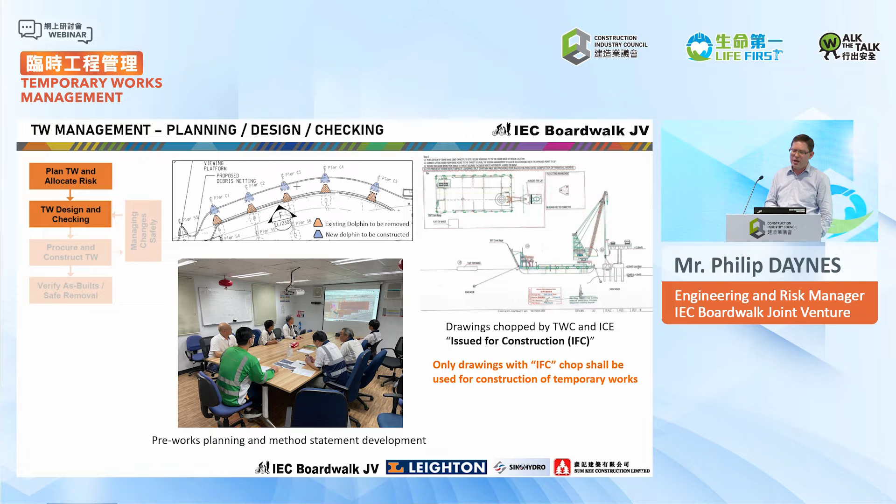So one of the early things we did on the boardwalk was remove some of the existing dolphins. Again, the pre-works planning, the method statement development, taking the design process, going through the designer and the ICE, and then issuing drawings for construction.

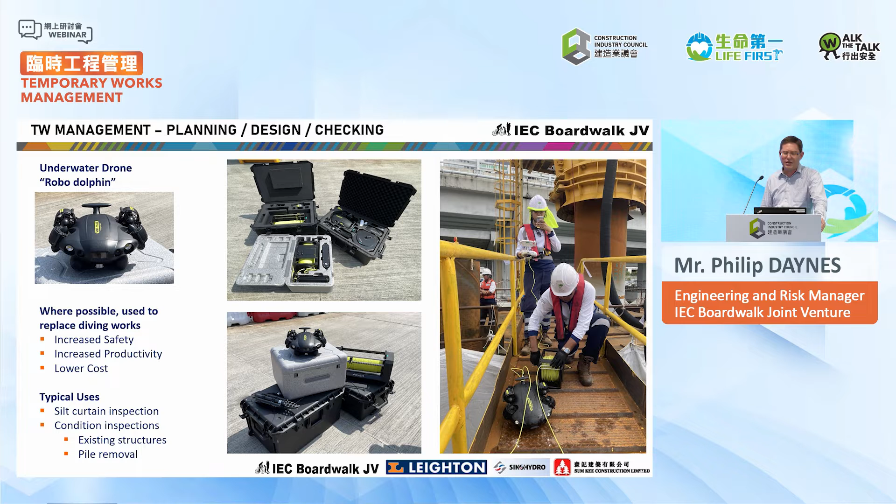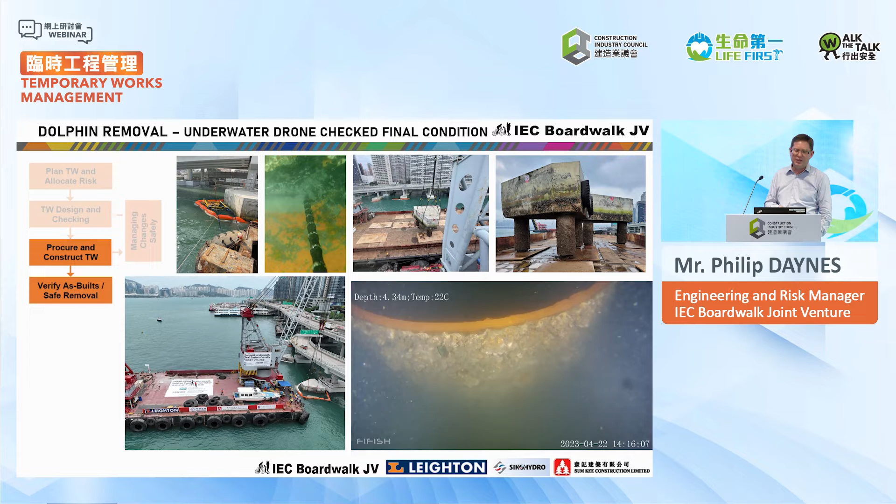So these tools aren't exclusive - we can't eliminate divers completely, but you can take them away for a lot of routine things like silt curtain inspections, condition surveys, and validating some of our work, such as pile removal. You can see the video taken by the dolphin in the bottom right-hand corner, and some pictures. We don't need to send people down to take a video to prove the pile's been removed to 0.5 meter below seabed - that can be done remotely by any range of people. So using technology eliminates people working, which is sort of what Ian was talking about as well - adopting and implementing technologies to take people out of high-risk activities.

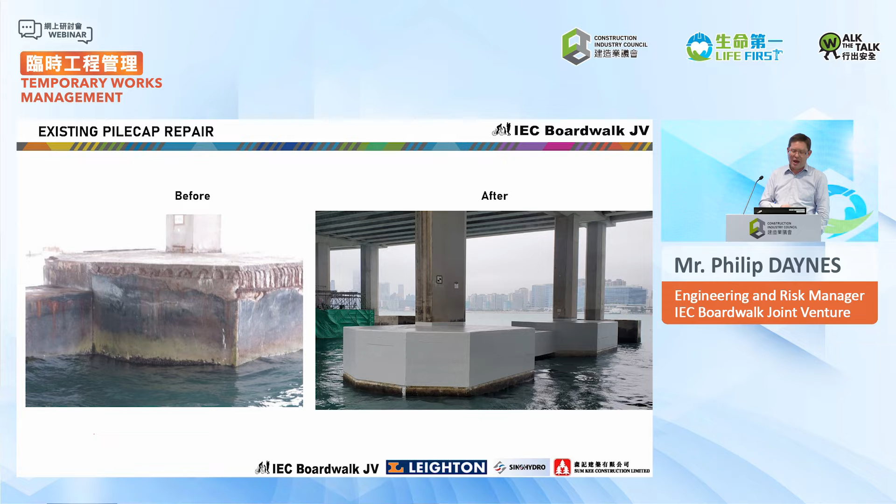Existing pile cap repairs. The Island Eastern Corridor has been constructed for over 40 years, and the Highways Department have a rolling maintenance regime. As part of the boardwalk project, CEDD took some of that on board, and we had to repair a number of pile caps. We had different types of working platforms to do this - some where we lowered a basket onto sliding rails which then moved along the pile cap, others where we did traditional scaffolding for various constraints. So different solutions for different areas with different advantages and disadvantages.

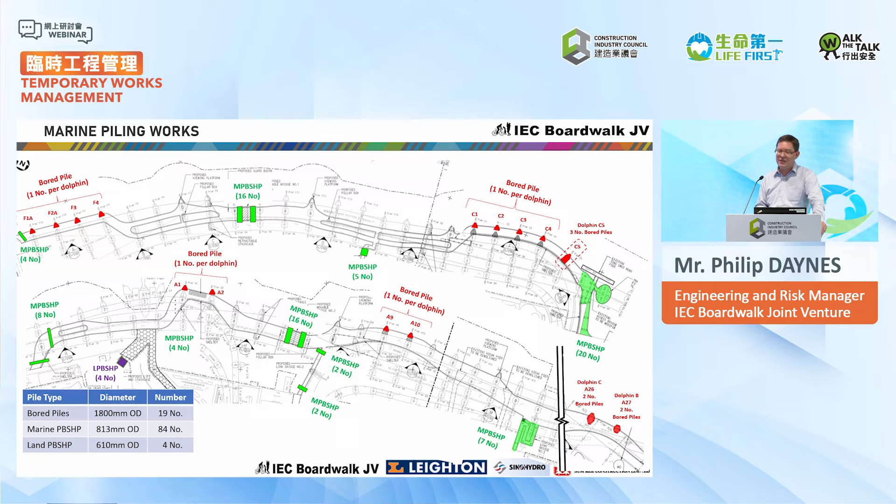Marine piling. Anyone who's driven along the Island Eastern Corridor in the last year has probably seen a lot of barges parked quite close to it. We've got piling outside the Island Eastern Corridor on the harbour side, piling inside the Island Eastern Corridor, and piling underneath the Island Eastern Corridor. So we've got different solutions in different areas.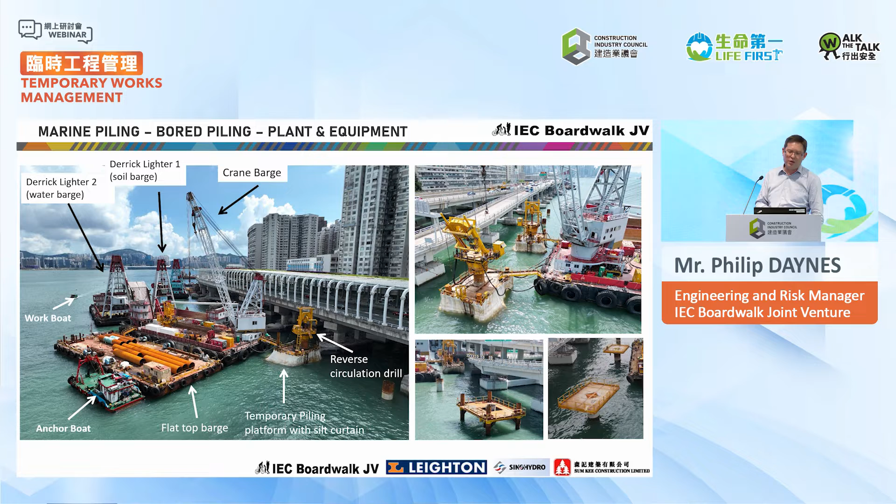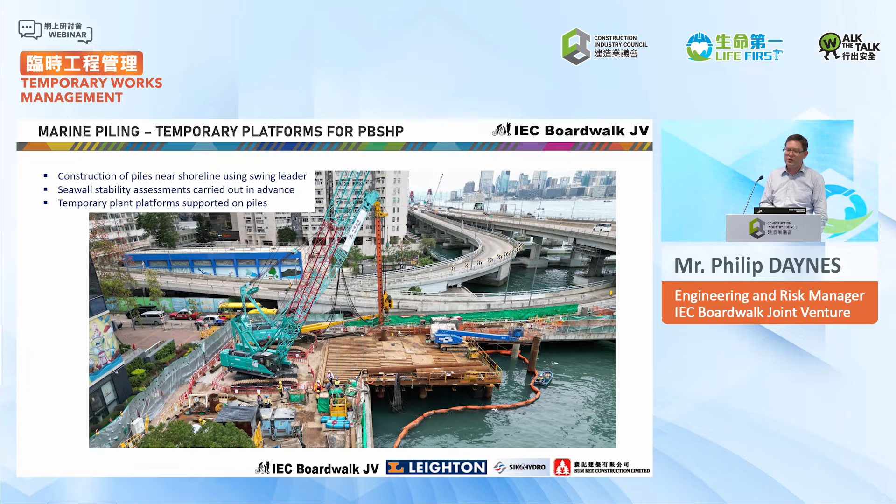Inside the Island Eastern Corridor, we can't use those big crane barges, so we're looking at using piling rigs with swing leaders, working on the existing seawalls and then building platforms on temporary piles into the sea. From a temporary works point of view, we have to assess the seawall stability, carry out any enhancement works necessary, and then design the platforms.

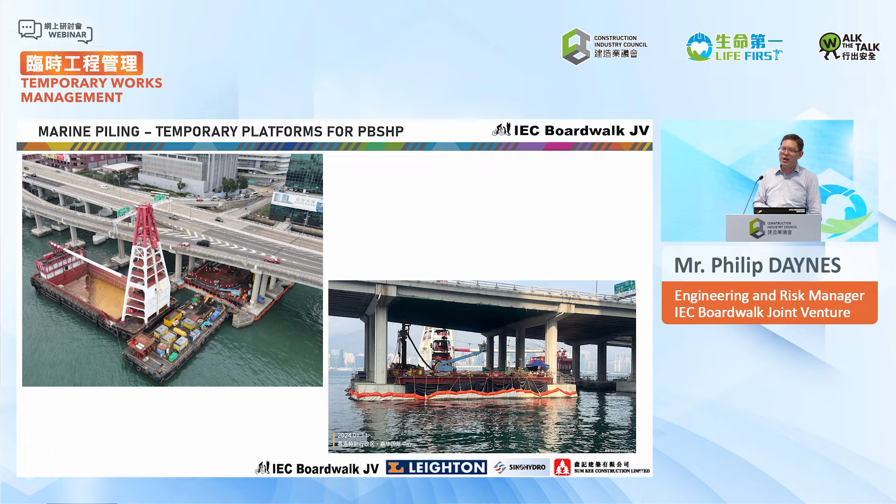Underneath the Island Eastern Corridor, we took a different approach. Because we're working under the corridor, we can't use big cranes and have very limited headroom, but we have the opportunity to barge in platforms. We fabricated the platforms in China, delivered them by barge, floated them in, and lowered them onto the existing pile caps, meaning there was effectively no temporary work for construction of these platforms on site. We've got 40 metre by 20 metre working platforms installed in a morning and ready to operate immediately. Again, we're using flat top barges for storing supporting equipment - compressors, water tanks, generators, etc. - which aren't stored on the platforms, so the platforms are designed just for the major plant: the cranes, the piling rigs, the elevated working platforms, etc.

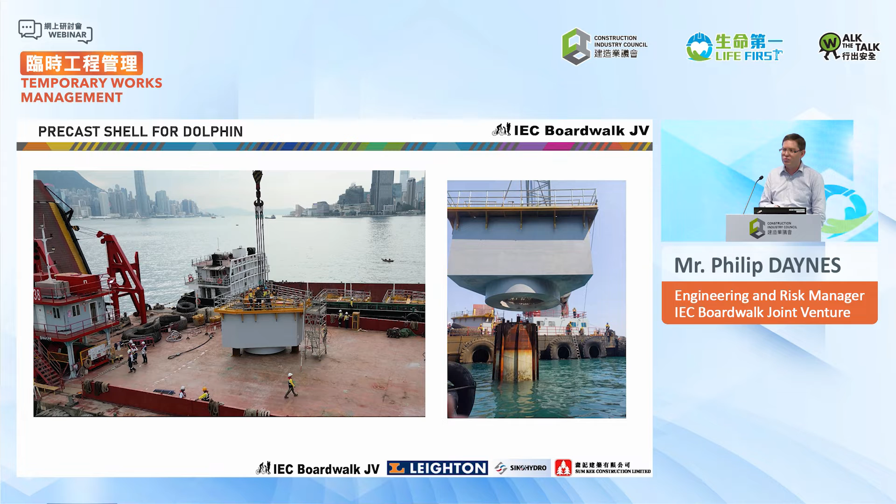Precast shells - again coming back to off-site fabrication, minimizing work on site. We're currently installing the precast shells on top of the bored piles now. The precast shells are constructed in China with access platforms already on top of them. We still have to do site works to prepare the bored pile to lower the dolphin onto and ensure a watertight seal, but that's much reduced. And straight away, we have a safe, dry working platform for construction of the in situ reinforcement.

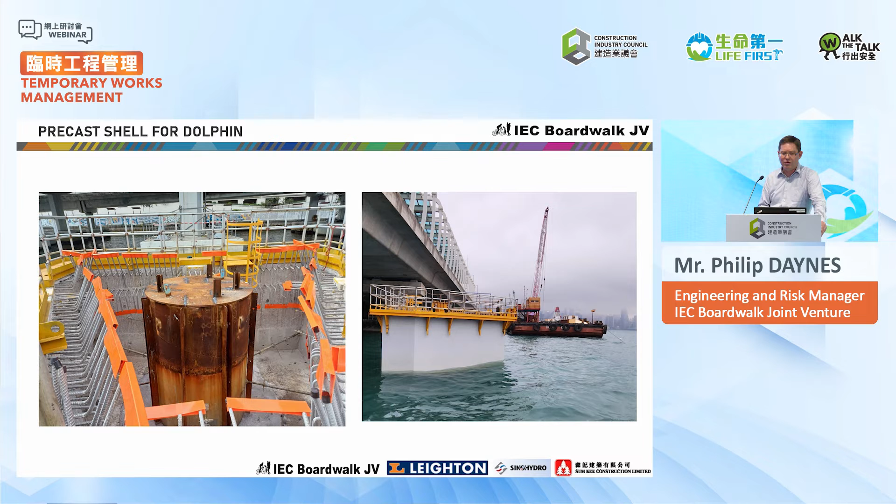So again, it's a very efficient way of working, reducing temporary works on site and utilising off-site manufacture. And then that leads us to the boardwalk deck, the main boardwalk itself.

This is the opposite of the platform approach. We have 63 deck units, every single one unique. They range between 150 tons and 450 tons, typically 25 metres long because that's the pier-to-pier span on the Island Eastern Corridor, and the width varies from 6 to 25 metres. You'll see on the coming slides how we manufacture them.

In terms of installation, we started in a stepwise manner, starting with small, low panels and one panel per delivery. We then increased complexity, moving on to more panels per delivery, up to 3 panels in one delivery, the high panels, and putting more architectural finishes and building services on the panels.

All of the modules are built in Zhongshan in China and then barged across. This is the offsite production yard, and you can see a whole range of different shapes and spans under manufacture at different stages. It's a steel beam composite deck, and we're adding the conduits, the screeding, the parapets and cladding, etc.

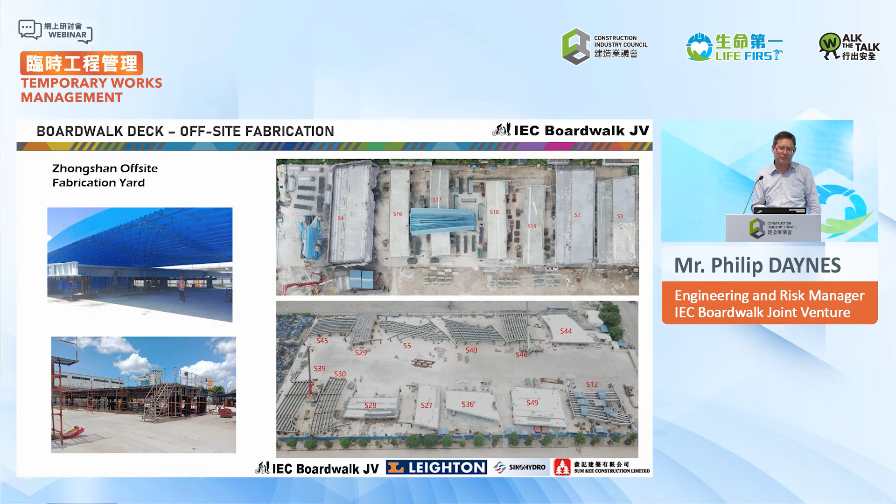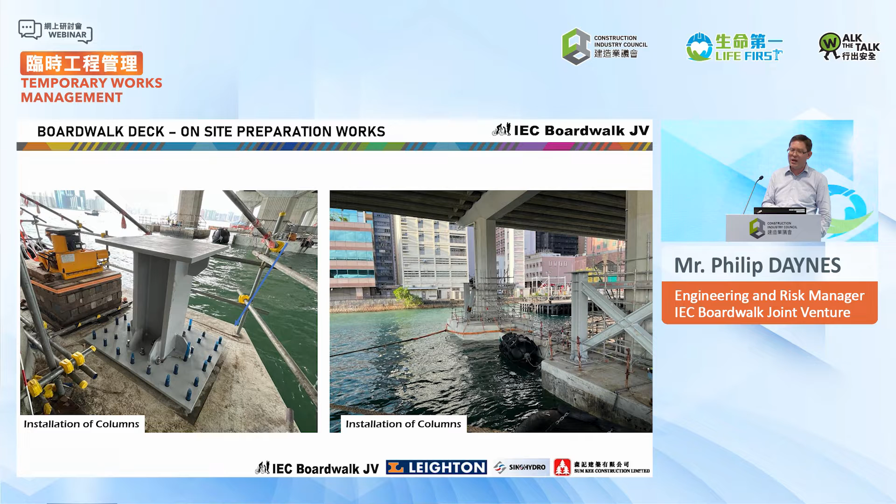So again, we still have works on site. We still have to install the support columns. You can see one of the lower columns on the left-hand side, some of the high columns on the right-hand side, because the boardwalk has to go over some existing piers.

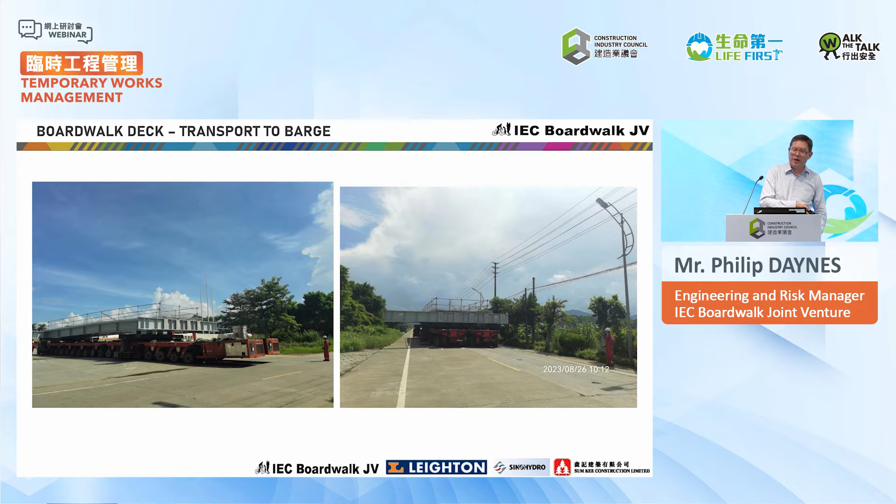The first module with all the banners is delivered from the fabrication yard down to the barge using an SPMT. Again, onto the barge, delivered to Hong Kong, getting ready to install.

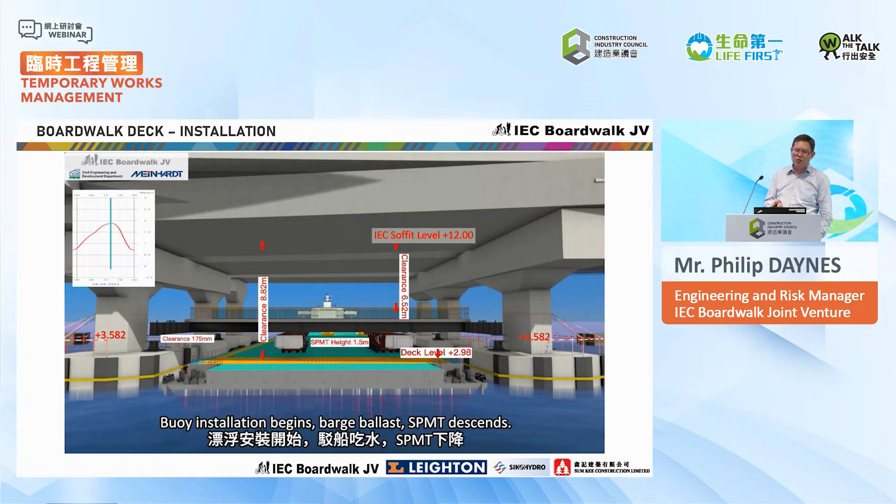Not only is each panel unique, but each installation process is unique. The mooring is different for each panel, the tides are different, the weight, the geometry - all different. So we assess each location on its merits, and every single span has its own method statement for installation, understanding the clearances we're working to, the tide timing, and the levels needed before final securing.

We do construction animations for a range of temporary works to help people understand what we've got to build, and then we do the briefings. It's generally the same team doing the installation, but the start time, end time, tides and weights are all different.

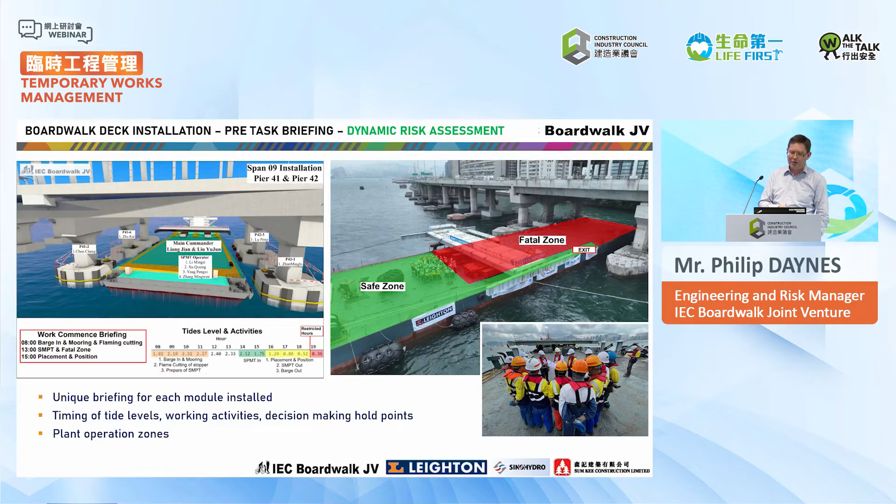So we do dynamic risk assessments. Before every panel is installed, all of the workers, the supervision team, the RSS team - everybody stands around and goes through the same briefing. This dynamic risk assessment approach is applied across the project, not just for deck installation, but precast shells, extending piling platforms. It's a really key part of the works, and I know it's something CIC are actively promoting as well - dynamic risk assessment through construction to alert workers on the risks and reduce incidents and accidents.

I hope that was a useful talk. And now I'll pass over to Thomas, I think. Thank you, Philip.